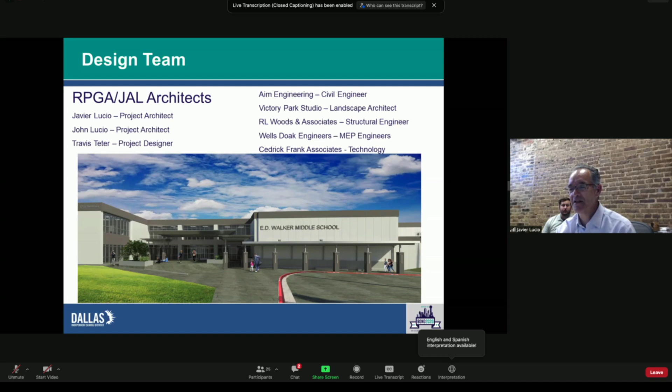So a quick overview of the existing site first, and then we'll get to the new site. And if you have any questions as we move forward, you can put them in the chat or raise your hand. I have no issue with stopping the presentation to ask or answer any questions you might have during this presentation.

Some of the things we talked about at our last community meeting: updating the school to meet the new DISD standards, and improving security for the site. Obviously, that's a key thing we're doing at all the campuses now for Dallas ISD.

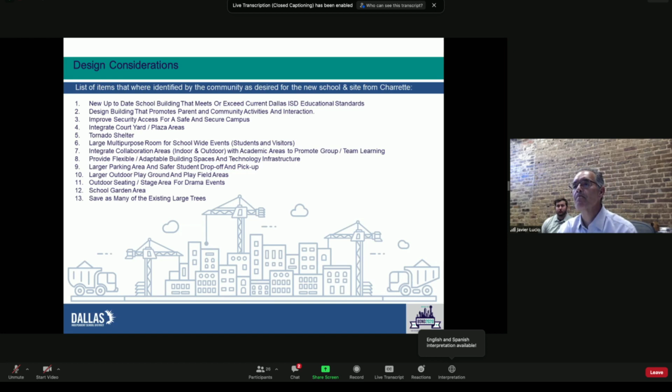Just to give you an update on the status since we last met, we're going through different services being procured as we move forward. That's environmental phase 1 of the existing building, to determine any environmental issues in tearing down that building. Because of this site and its size, demolition of the existing building will be required to build your new school.

As mentioned earlier, we've got traffic issues that will be addressed on the new site, and we've got a traffic study that has to be done to determine traffic loads in that area at different peak times of day, so we can properly address the parking and drives for the new school.

Also, because of the age of the school, we will have to go through zoning. It's a pretty standard process - the school is already there and we don't have any zoning requirements requiring variances, but we do have to go through the process of doing what's called a planned development for this campus.

A geotechnical report, which will give us information on the soil conditions we're dealing with, is part of the process - we're getting that information from a consultant, and that's also in procurement. One of the last things is getting the site survey and tree survey, also part of the design process, making sure we understand the grades and drainage issues we have to address on the site, as well as saving trees and taking care of some of the natural qualities of the site.

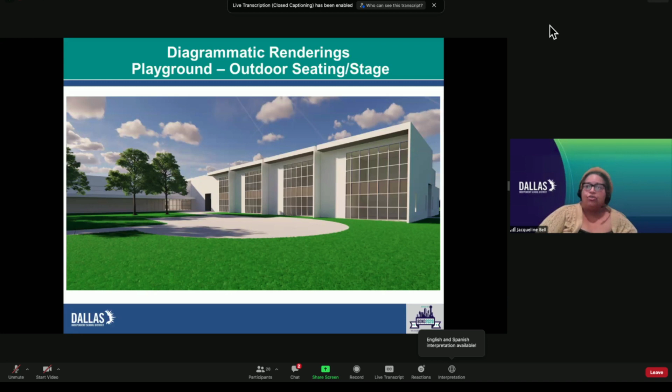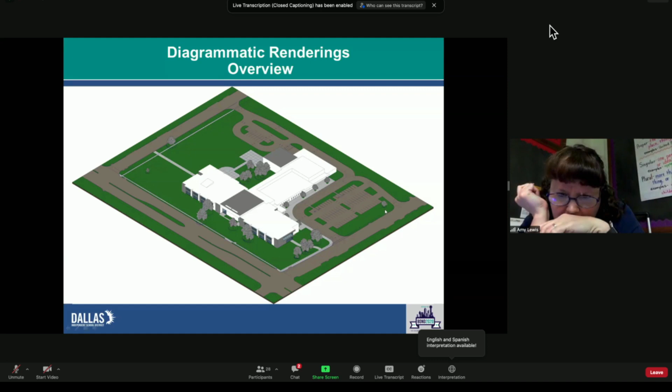Can you explain the traffic flow, how for pickup and drop off again? Is that 3 lanes or is it just 2? We're showing it'll be 2 to 3 lanes.

This hasn't been finalized, but depending on what the traffic study shows, we'll be able to queue up vehicles here. There's even discussion that if necessary, we could queue through the parking lot to extend these queue lines. We have the ability to queue along the east side, as well as coming in from the west and queuing up along here, whether we queue up buses or whatever. We're trying to maximize the amount of queuing available on site, anticipating what this traffic study is going to give us.

Does that answer your question? Yes, thank you. Okay.

We're just trying to keep anything from happening on the front of the school. Even visitors will come to the back as well. We've removed the lane that's in front now that was part of the original building, and moved everything off Lake June.

I have a question. Go ahead. Is the school going to be fenced up around the front and sides, or is it going to be an open design?

More than likely, it'll be fenced. Usually the perimeter will be fenced around this backside, and more than likely there will be a gate on all these entries as well. The parking area may be left open, so I'm anticipating the fencing may start along this edge here, and the rest of this would be fenced in.

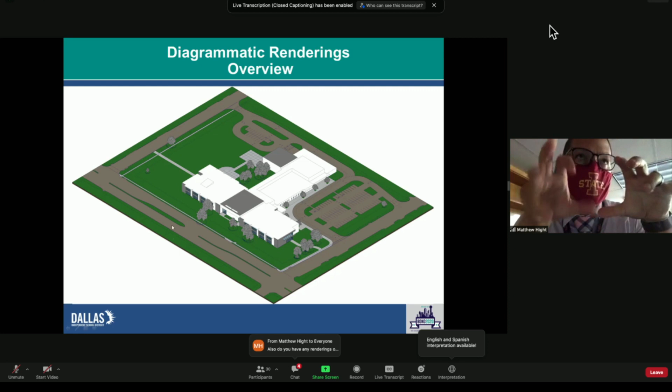Mr. Hight, if you'd like to unmute and ask your question, or put it in the chat, you want us to go ahead and answer it for you? Yeah, I was just wondering if you could go back to the slide that had the actual floor plan showing the classrooms, and also if you had any renderings of what the second floor classroom layouts might look like.

No, the second floor will be similar to this as far as the layout. Again, this is very, very early, so I don't want to get too much into the weeds because these are just blocking diagrams.

That's when the staff is there controlling who enters the school—that's a different time. But during school hours, at the beginning of the day, all access comes to this point. Right now we're thinking the media center will serve as a nucleus to the school for admin, for the entrance, and for the classroom wings. But as far as specific layout of the classrooms, we're not at that point yet.

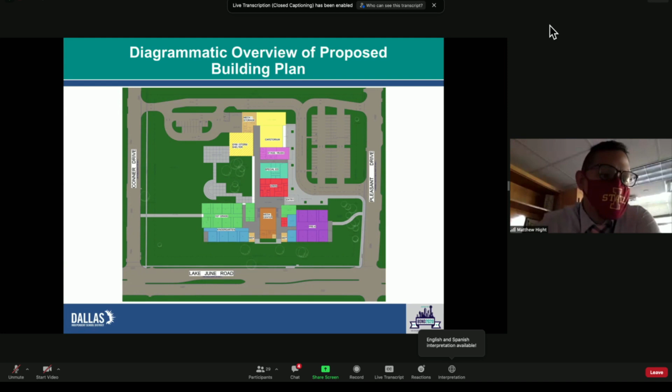Is the media center one floor or two floors? That hasn't been designed yet, but it may be partial two-floor. We haven't determined that yet.

So are we going to be able to save the garden, keep the garden and the small amphitheater that we already have? We're not going to be able to keep the one you have, but we may be able to reuse parts of it—we will recreate it. That's something we're showing in this area. Once we start working with the landscape architects, we know it was important to you, so we will recreate it. Right now I think it falls in this general area. So we won't keep the one you currently have, but we will recreate it.

Could you go into a bit more about the potential outdoor spaces—playgrounds and other areas accessible for the kids and the community, or any thoughts on those? So this general area will be the play fields, since as an elementary school you'll have playground equipment as well. There's typically a separate playground for the pre-K children, so if pre-K ends up here, they'll probably have their own fenced-in play area on this side. The elementary school's 2nd through 5th graders also have a different level of playground equipment, so theirs will be designed separately. We've got this area to the west for that. It hasn't been detailed yet, but we'll work with the landscape architects to get it all arranged—that's part of the requirements for an elementary school.

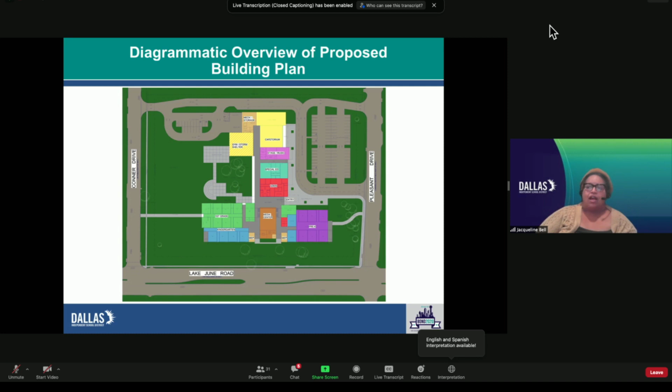Sure, and there's also a question about whether there's space for soccer fields. As far as soccer is concerned, this site isn't large enough for a complete soccer field. This area here is large enough for a field, but not a full soccer field—there's not that much area on this site. But that's something we account for in all schools; there will be some area allocated for large play like that, whether we put goals in or not. At this point I don't know, but more than likely I anticipate we would.

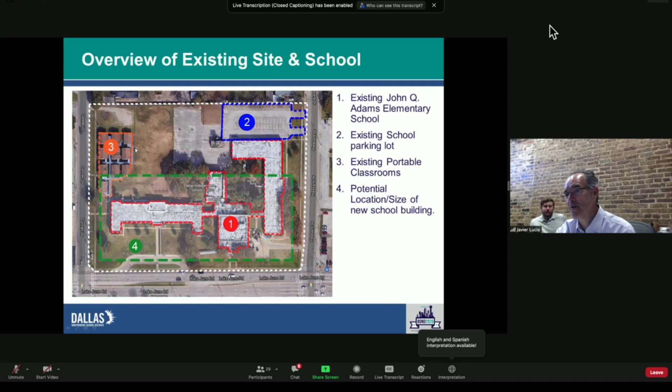So I'm going to go back—this is just showing, real quickly, for those who joined late. Showing the existing campus here, the original building with the original drive-through, the auditorium, the admin area, then the addition that was done, the gymnasium added later, the existing parking lot, and the portables added over the years. Now I'm going to skip forward to the new proposal.

So now we're proposing that, because of the limited area on the site, the existing building will need to be demolished to make room for the new school. The placement of the new school area was based on the existing trees there, trying to salvage as many as we can, and also trying to maximize the queuing available on the site for pickup and drop-off. That's why we've moved the entrance to the Pleasant Drive side and created this entrance in the corner, maximizing the queuing available from both Pleasant Drive and Conner Drive.

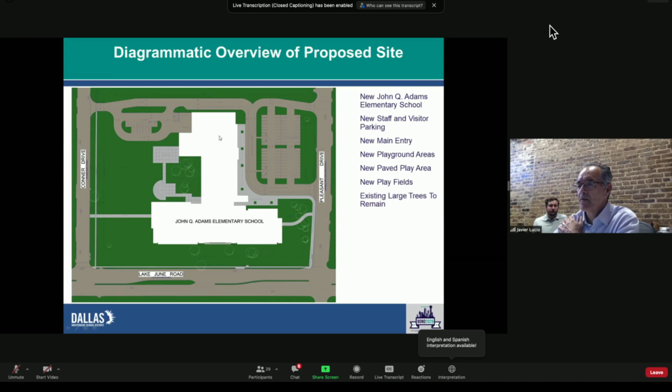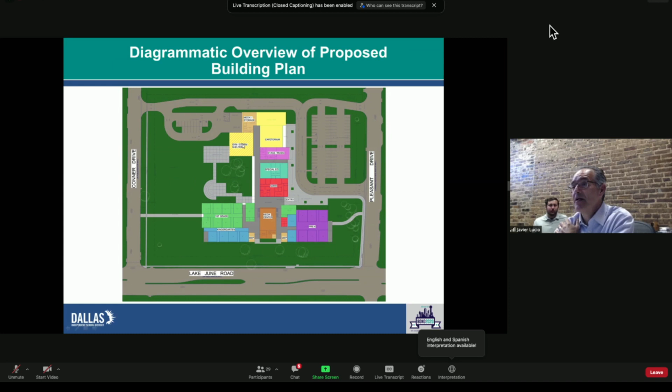As we were showing earlier, the basic layout of the classrooms with the media center centralized between the admin and the two classroom wings, and the cafetorium here at the back of the gymnasium on the north side of the school.

Real quickly, I'll go through some of the renderings we've done from different viewpoints. Again, very preliminary - these are only massing studies. This is not the design of your school. That'll come as we develop it further with the team.

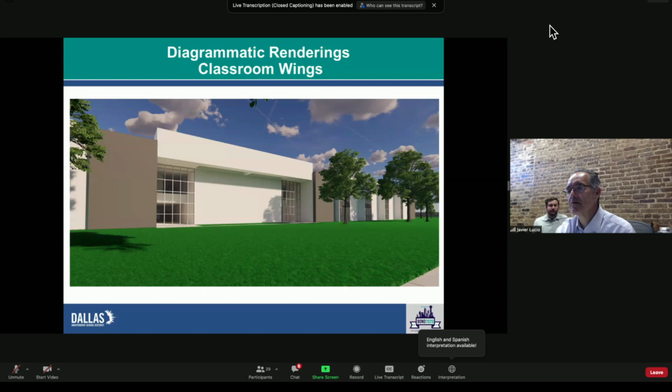And then a view from Pleasant looking at the main entrance, with the main entry here, classroom wing to the left, and then the admin to the right. Showing the space where vehicles will be able to queue up for drop off and pick up.

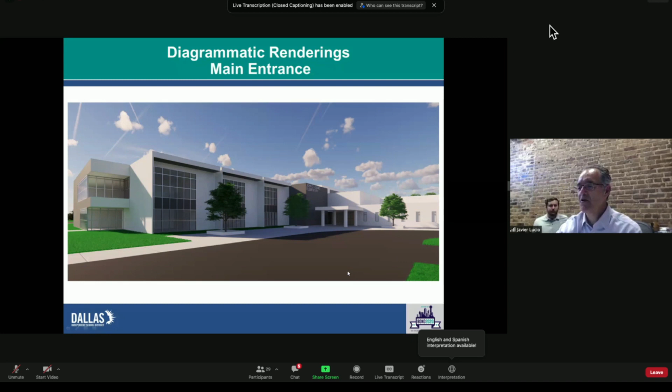Ms. Reed, a view of the area where the outside theater area will be, with classrooms on one side and some kind of theater that we'll introduce here, trying to save the existing trees that are there. This area will be fenced in, giving more control of how we work from in to out, maximizing the ability for you to teach inside and outside.

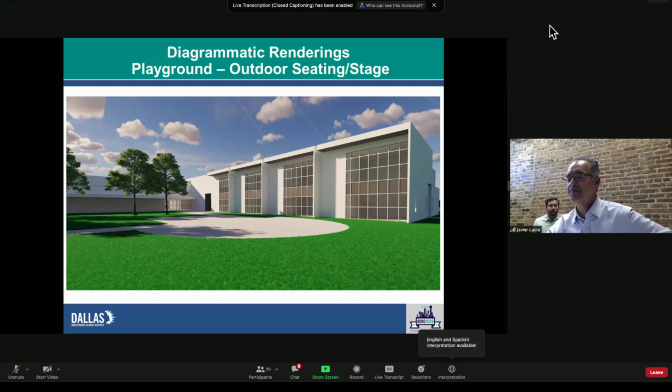That was it on those renderings. I'm going to put it back on the 3D, just to give everybody a viewpoint of where everything is.

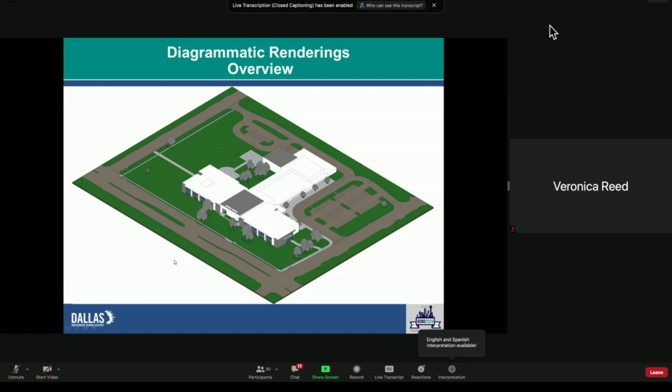So we do have a number of questions coming in and comments on Facebook. Some of them we've answered, but I just want to reiterate the answers here. When will they start building the new school? We're looking at, perfect world scenario, for actually beginning demolition in summer of 2022, and then construction beginning soon thereafter. Is that correct? That's correct.

Okay, great. And about how long would it take to build the new school? Typically they take about 9 months to a year. Again, in a perfect world - because of the demo and not knowing what we're going to find when we demo the building, there's usually some surprises we dig up - but we would anticipate at least a year, and that's why I think it's more realistic that we probably would open in the winter at the end of '23. Okay, so like 2024. Yeah.

And we do have a parent commenting on Facebook who wanted to share her comment here. For the record, it says: my daughter's last year of school is next year at John Quincy Adams. So you're saying that she will be going to some other school, possibly her last year. And she asks the possibility, not even with her friends, for the last year, to try to keep those fifth graders together so they can enjoy their last year in elementary school together.

So that's one of the concerns, Mr. Alfred, if you could share that with school leadership. Yes, I will. And the sentiment of school leadership is to keep the kids together, because like I said at the beginning, we're doing probably 14 campuses like this, and other communities have similar concerns. School leadership has always stated that's their goal, to keep kids together.

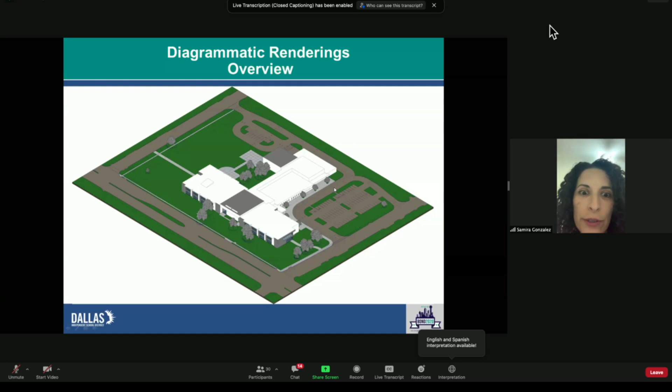I would love to see an exit point close to where the pre-K and lower grade classrooms are, so that they don't have to walk too far. Correct.

Yeah, right now that's why we put the pre-K children there. We're anticipating the pre-K wing being here. They would have their own playground area. We're able to isolate them a little bit better. We would have the ability to create their own entrance and exit here as well, next to admin. So yeah, the pre-K are a focal point for these schools.

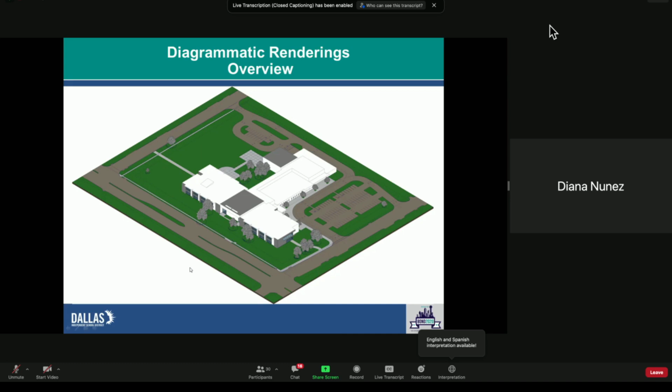That is correct. We'll get the plan once it's more ironed out, and then we'll meet again with the community to try to address the questions that are being brought up as soon as we do have that school leadership meeting and see what options are available. So we want the Pleasant Grove community to know that we do have the right people on this call. They are listening, they are making note of these concerns, and we'll take them back into consideration as we're moving forward planning for the new John Quincy Adams Elementary School.

There's a question about security cameras in the new building. I know there's a number of security features in all the new buildings. Mr. Alfred, do you want to discuss that, or Javier? I can take that, Brent, if you're okay with that. So, as part of the ed specifications for the school, security includes not only access into the building, but also cameras throughout the school. That's just part of the requirements of the new standards for Dallas ISD. So yes, those will be addressed and included as part of this work.

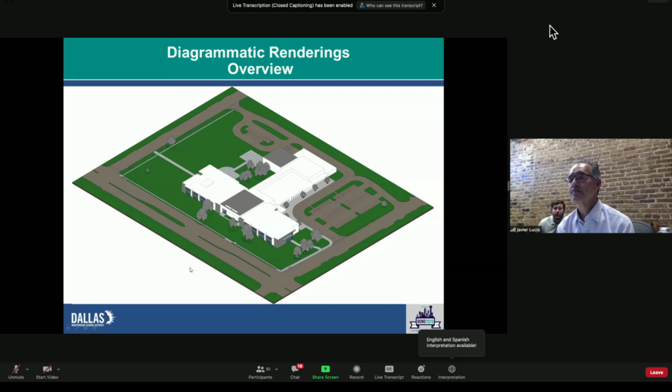So as we seem to be winding down, Mr. Alfred, if you want to go ahead and go over next steps at this time, so we'll know when we leave this meeting exactly where we're headed. I'd like to thank RPGA for doing a great job with this presentation. I think we got a very exciting design, and they're taking the community's feedback. As far as next steps, we're going to go back to the drawing boards, and we're going to have Javier and his group redefine some of the architecture a little more. When we come back to you, I'm anticipating around November, December, we'll have some more imagery to show you. In the meantime, we're going to be working with small groups, some academic groups, to go over space planning and programming and tweak that a bit before we roll out the bigger imagery to the community. So look forward to hearing from us individually, with the small academic groups, and then with this larger group sometime in the November, December timeframe.

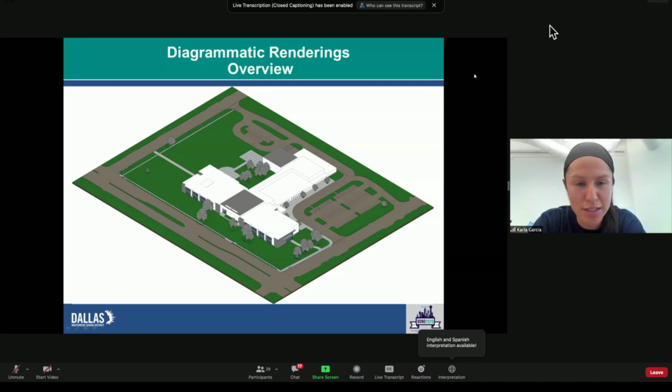Yes, thank you. I just want to thank Trustee Garcia and my wonderful ED, Ms. Nunez, I know this is a new project for her, and also the parents, thank you for connecting, and our teachers too. Remember that this is a project for you, so your input is very, very valuable. So for the small groups, whenever we call you in, please get involved and share your input, your ideas, your concerns, everything, because this is for our scholars. Just to reiterate what Ms. Garcia said, we are very, very excited about the project, and we are ready to share our ideas and the great thinking that we have with the architects. So have a great evening, everyone, and thank you again.